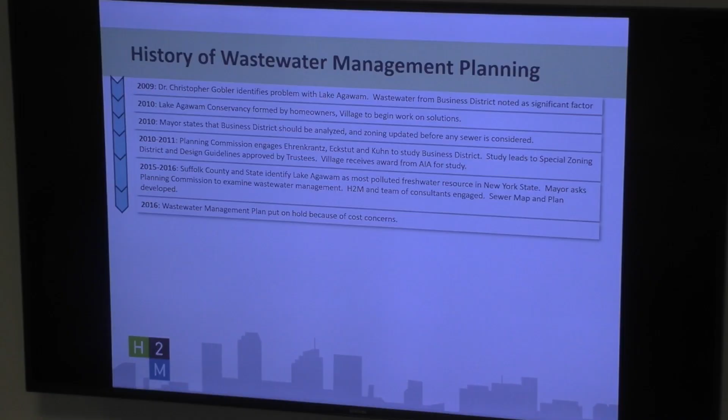H2M and a team of consultants were engaged after an RFP, and a sewer map and plan was developed. At the time in 2016, largely because of cost concerns, the wastewater management plan was put on hold, and partially I would say also allowed time for consensus to develop among village residents.

In 2018 and 2019, the village actually took some pretty broad action to address storm drainage issues, receiving grants for catch basins and other elements on Hill Street, Windmill Lane, and Jobs Lane.

And in 2018, a member of the Planning Commission, now mayor, put together on behalf of the commission a menu of all the options that had come out of all the studies and all the people who had looked at the lake.

Following that, really at the very beginning of 2019 in the winter, some residents of the lake who had not been active previously in the Lake Agawam Conservancy got involved and reinvigorated their role.

A little later that year, the new mayor and new trustees focused on clean water as a priority when they first came into office. A clean water committee was established, and the commission's done a lot of work with them - they've really done a great job. Mark Schiffer's been very involved with them. The town, county, and state were engaged by the trustees, and the Clean Water Committee created a multi-part agenda to address Lake Agawam with both public and private initiatives.

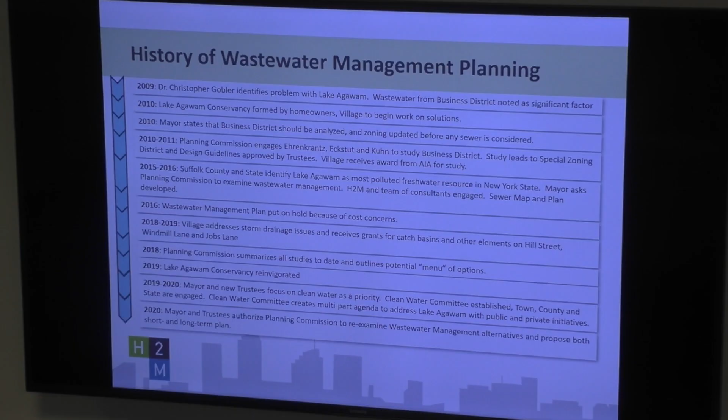One of the items they talked about was a wastewater management plan and addressing the stormwater issue from the Village Business Center. I should also say at the same time, the Planning Commission, starting with the Ehrenkrantz, Eckstut and Kuhn study, identified the need for a broader range of uses in the business district if it was going to be successful long term.

The need for more restaurants, more residences, and other uses that currently the Suffolk County Department of Health does not allow to open in the village. In the years after the Ehrenkrantz study, occupancy rates in the village went through a continual decline for the succeeding five years. We are now at a point where our occupancy has picked up.

Some of that may be transitory, hopefully some of it will be more permanent, but it is an issue of great importance. So in 2020, the mayor and trustees authorized the Planning Commission to re-examine wastewater management alternatives, and importantly for the context of Nick's study, to look at both short and long-term plans. So with that, I'll let Nick get started. Some of this presentation is going to be a refresher, and some of it's going to be new information that's been developed since we last were engaged with the village.

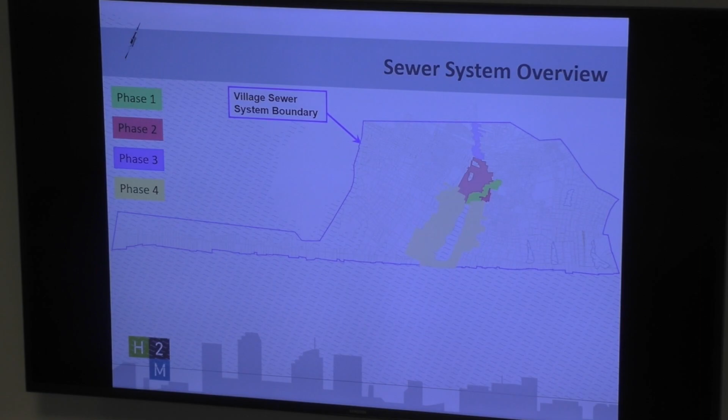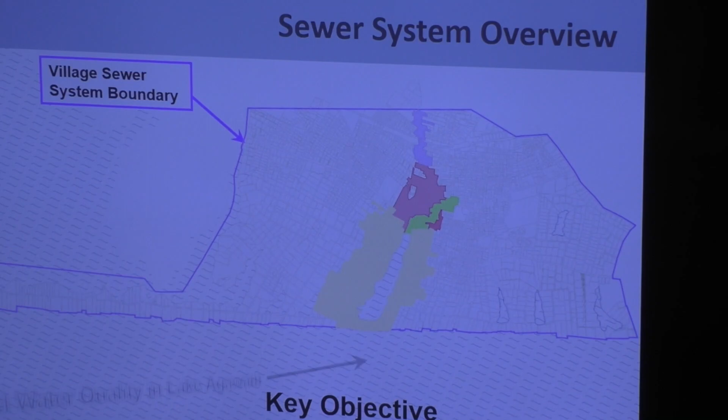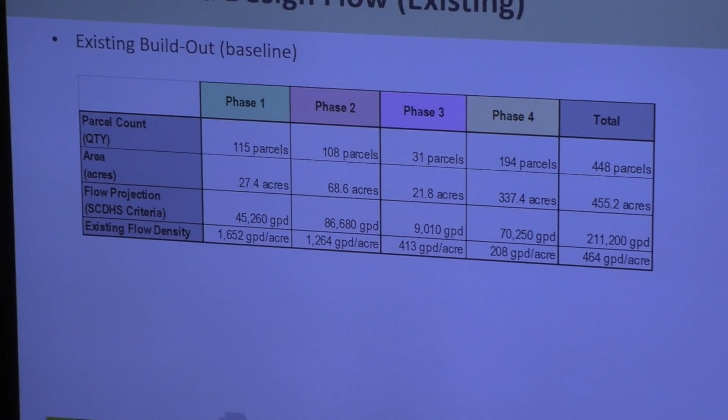However, upon further investigation, you'll see that the key objective again is Lake Agawam, protecting that water quality and improving it. As far as existing build out goes, we had evaluated each one of those areas previously identified, and most importantly, I want to draw attention to the phase 4 area.

That area is residential, low density, and it actually meets current sanitary density code restrictions of 600 gallons a day per acre. So looking at that in terms of putting sewers there, being that it's such a widespread area, the cost of infrastructure would be significantly higher than that of residential owners pursuing CPF money if eligible, but to put IA systems in to service them, to replace their antiquated systems. Phase 1, phase 2, again, is the original core area that was identified 5 years ago.

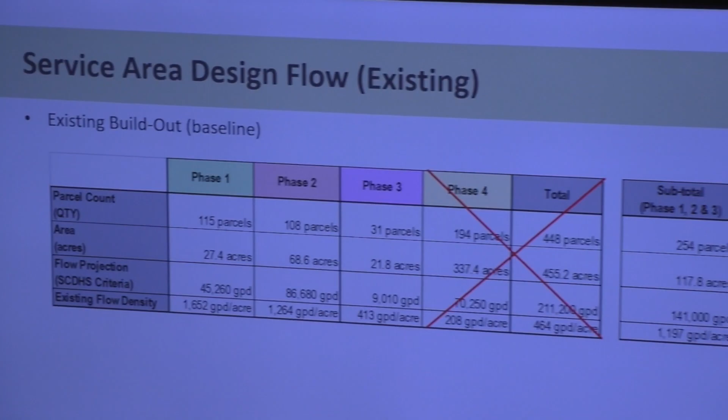And again, the phase 4 area meets the density restrictions associated with groundwater management zone 4. So essentially what we're looking at in terms of ultimate build out, big picture, is to provide service to phase 1, phase 2, and phase 3. You can see all of those phases combined is about 254 tax lots, about 118 acres, and the existing flow projection based on health department design criteria is just over 140,000 gallons a day. The existing density across those areas is about 1,200 gallons a day.

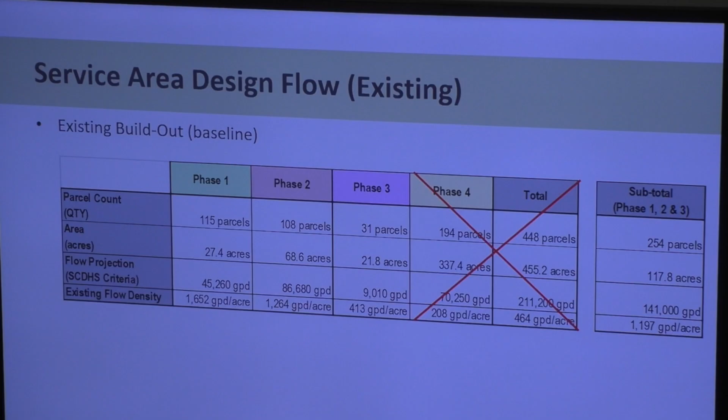So part of the study - development and environmental improvement are two key factors - but as far as development goes, there was a zoning overlay done. You need to assess what your future build out could potentially contribute in these areas. So one of the methods, we looked at many, that we thought was appropriate was applying an area weighted flow density from 3 existing downtown Main Street business districts in Suffolk County.

The 3 being Village of Patchogue, Lindenhurst, and Bayshore. When you weight their flow density across the areas they serve, you get 3,179 gallons a day per acre. So that would be your flow density.

We felt it appropriate to apply that to the phase 1 area only. So when you apply that density to phase 1, it results in almost a 2-time increase in terms of what flow could be generated there. We felt that appropriate to accommodate what potentially could come in after the zoning overlay, after you do have sewer availability.

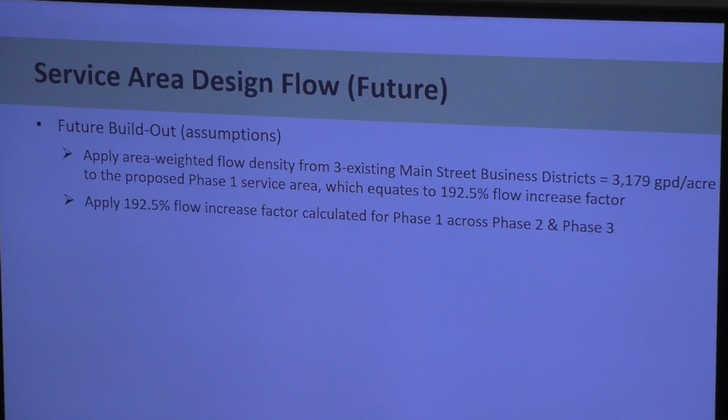So essentially what we did was we looked at the relative increase in phase 1 from adjusting to the existing Main Street business district densities, and we applied that relative adjustment, that 192.5% flow increase, to both phase 2 and 3. In doing so, we came up with a new flow projection across phase 1, 2, and 3, and essentially increased the total flow over baseline by about 130,000 gallons a day.

Okay, it's a significant increase, but I think it's appropriate and reasonable to consider, given the zoning overlay and the sanitary restrictions you have now.

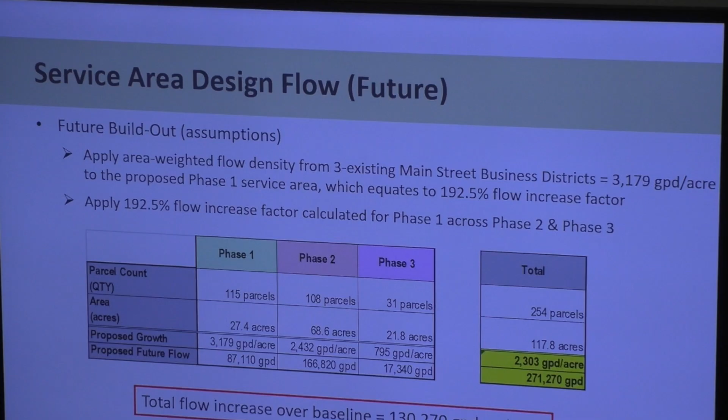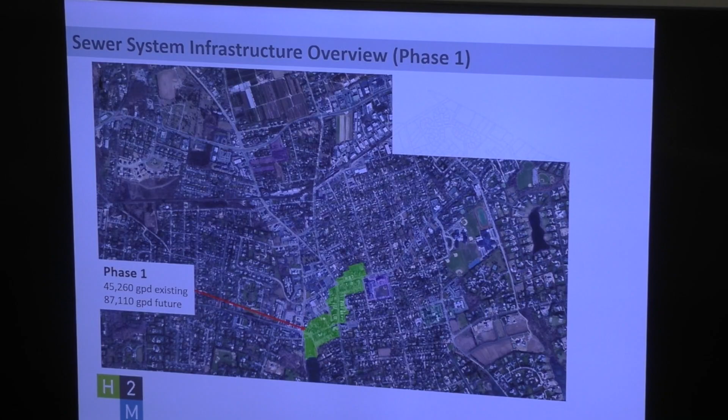So as far as infrastructure goes, I'm going to step back and just focus on phase 1. Phase 1 is the initial phase, and it would be the main focus of a map and plan moving forward. The phase 1 area existing flow is about 45,000 gallons a day, and with the future projection we just went through, it would increase almost double, up to about 87,000 gallons a day.

So as far as what you need to accommodate that, you need to know where to treat it. And I think we're all aware that there's been several alternatives tossed around. I know the next presentation is going to focus on one of those alternatives.

So that alternative is the existing Southampton Hospital treatment plant, located in close proximity to the phase 1 area. It will require a Suffolk County Sewer Agency agreement to facilitate how the village can connect to this privately held facility. Capacity expansion and SPDES permit modification requirements are to be determined. Again, there's been additional evaluations done on that facility that you'll hear more about in the second presentation.

The main issue with this facility as it stands today, and potentially moving forward in terms of feasibility with expanding that facility, is I don't believe it's suitable to accommodate the entire phase 1 through 3 sewering extents that the village is looking at.

The other alternative would be a proposed new sewage treatment plant to be constructed outside of the village, just north of County Road 39. There are two properties up there that are adjacent to one another, one of which is owned by the fire department and the other is owned by the cemetery.

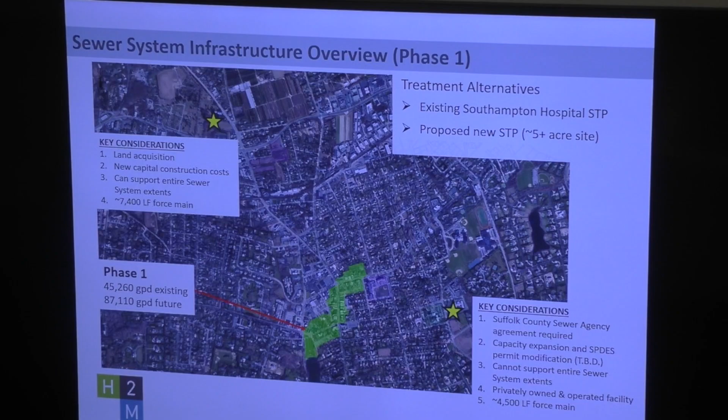So that is the trickiest part of the whole thing. As far as getting the wastewater to the hospital, that's another story. As I see it, your sewering alternatives are really routing alternatives.

The most straightforward would be a single gravity sewer run through Main Street, Job's Lane and Hill Street. Topography in the area tends to slope from north to south towards the lake. We were looking at a site just to the south side of the boundary. I believe the village acquired a property down there that makes sense to site a pump station on an easement on that lot.

In doing this though, the issues are you've got to have reconfiguration of interior building plumbing. Everyone's systems go out to their septic in the back, so you've got to re-divert flow to the front. Not only that, during construction there's going to be major disruptions to the storefronts and the sidewalks, so there's traffic and business issues there, as well as public relations issues. Once you start impacting business owners, I'm sure you're all aware, it's not going to make anyone's life easy down here. It's going to be problematic.

The overall footage of pipe you would need for this alternative route would be about 3,000 feet. The other alternative would be to route parallel sewers, essentially behind the storefronts where their existing drains already exit.

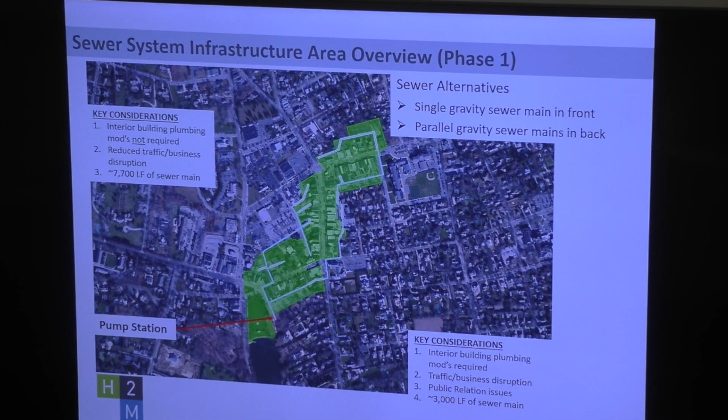Based on those overviews, some preliminary capital construction cost considerations, focused only on phase 1: you have collection and conveyance infrastructure, which would be sewers, force main, and pump station. Based on numbers we've seen recently in similar areas, assuming not just pipe installation but restoration, dewatering, and anything else you may encounter, barring unforeseen contaminants, you'd be looking at between $8 and $12 million to put in your sewers, force main, and pump station. That's a range covering both going in front, or the alternative to route the parallel mains in the back.

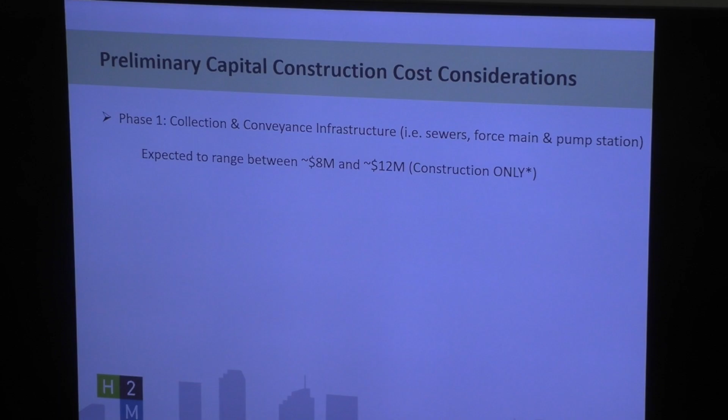These numbers are really just focused on construction only. As far as the treatment infrastructure, construction only, I have a number generated assuming you were going to build out a facility that could handle the initial phase 1 area at full build out, so it would essentially be a 100,000 gallon a day facility. To build a municipal type facility like that would be about $10 million on that property up north.

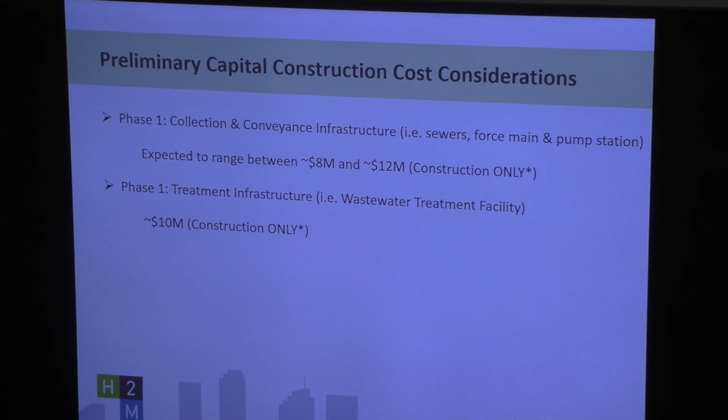The construction-only costs represent a range for the two different sewer routing options, as well as construction of a new treatment facility. I don't want to take away anyone's thunder, but I know they have a study that was done. They have costs associated with acquisition and improvements to the treatment plant at the hospital, where they're budgeting about $4 million of improvements to connect to it and serve the phase 1 area. I'm sure more details and questions may come up when they go through that.

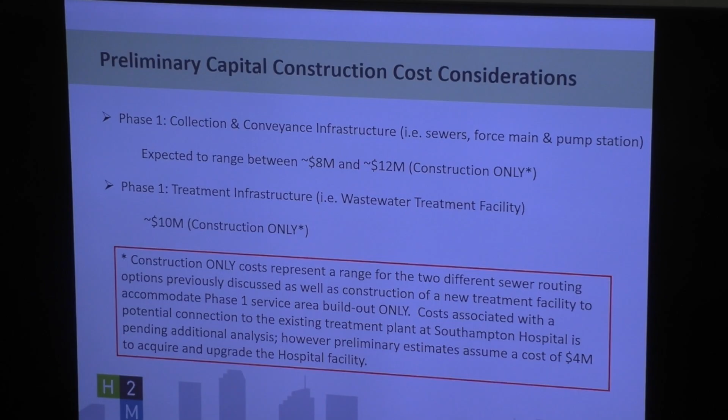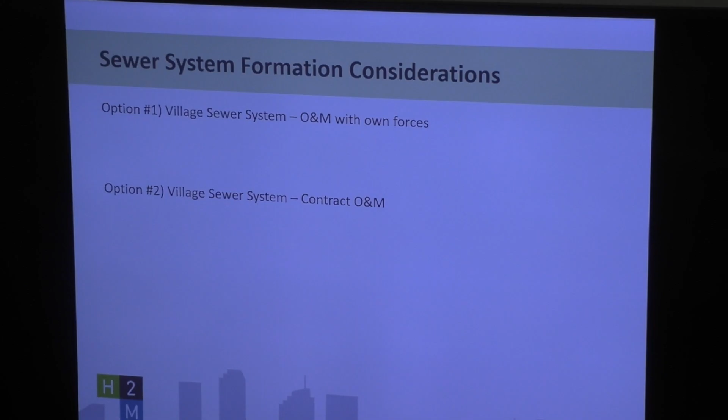So the sewer system formation considerations — this is really the core of the alternatives analysis. These are the questions that need to get answered before we can move forward. Your baseline option would be a village sewer system operated, maintained, and managed with your own forces. Option 2 would be a village sewer system where you contract out all operation and maintenance services. Option 3 is a village sewer system with a private utility agreement.

And again, I have cited here Lightower Capital Partners and the Suffolk Water and Sewer Company LLC, that they're stating they're going to operate under.

So option 1 likely is the most costly option — the village owning, operating, and maintaining infrastructure with your own forces. Without a doubt, this is going to be their most costly option. It does, however, provide the village full control over how you expand your district, how you assess your district, how you manage your district. So with costs come benefits too.

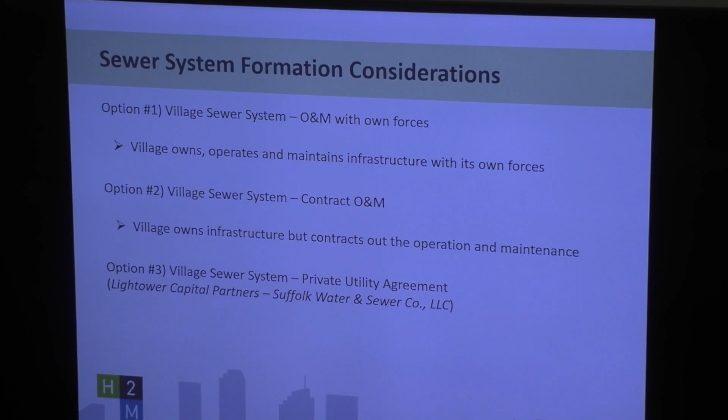Option 2, again, is the village owning the infrastructure but contracting out the operation and maintenance. The village has to administer and oversee contract work for operation and maintenance of infrastructure, and essentially perform your own quality control on that contractor to make sure the stuff you own is getting serviced properly per your contract stipulations. The last option is you enter into a legal agreement with a private utility who owns and/or leases and operates and maintains the infrastructure.

So there are many different iterations of how this can evolve, most of which I didn't dive into in detail until we get input from the next presentation — that's part of the conversations moving forward. Regardless of whatever option washes out at the end and becomes the selected one to base your mapping plan off of, all of them are going to require review by legal counsel for the formation of a sewer district.

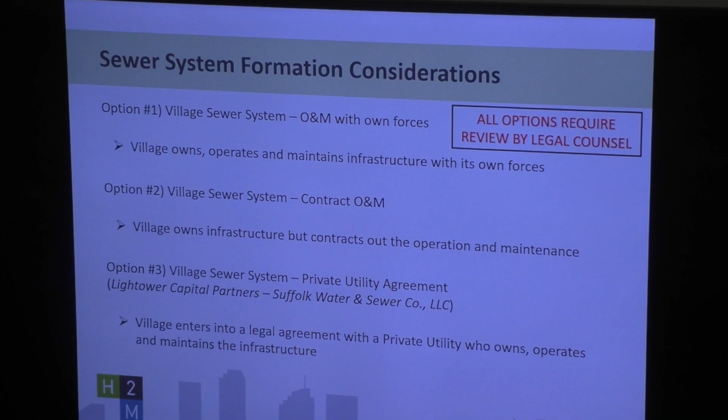The key next steps are really to confirm the feasibility of a hospital treatment facility for the phase 1 service area. You need to identify regulatory, fiscal, and legal requirements, and again that can go any which way — it could be a private utility, or a village working out a deal with the property owner. There are a lot of conversations that need to evolve in order to determine what makes the most sense moving forward.

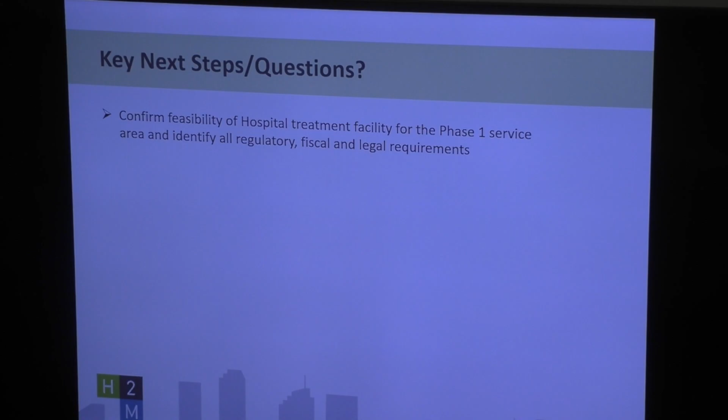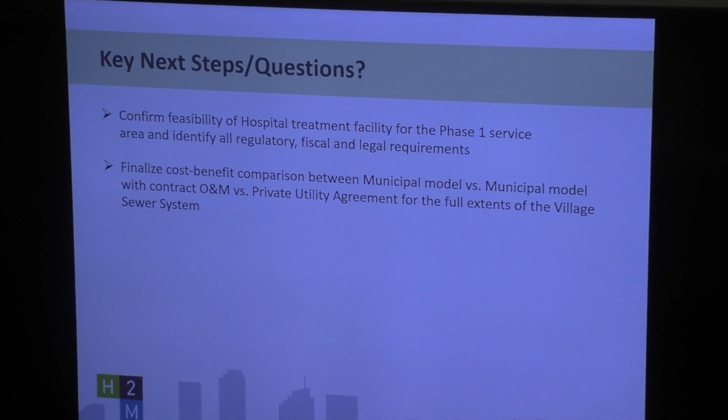Once that is vetted, then we could really push forward and finalize the cost-benefit comparison between the municipal model with contract O&M versus the private utility agreement.

Once you vet that and determine what your selected alternative is, now you have a baseline on which to prepare the mapping plan, and you can form your village-wide sewer system.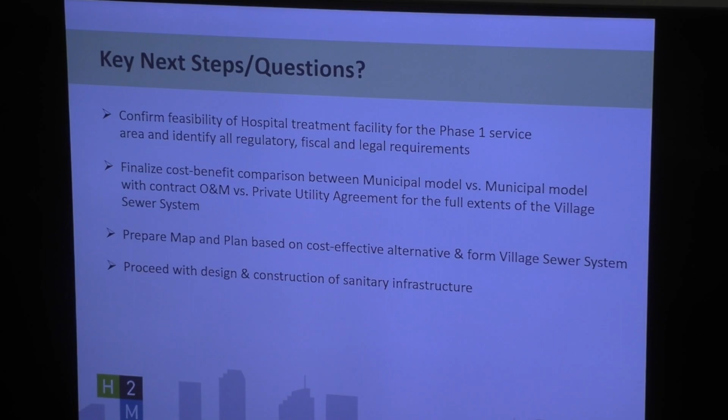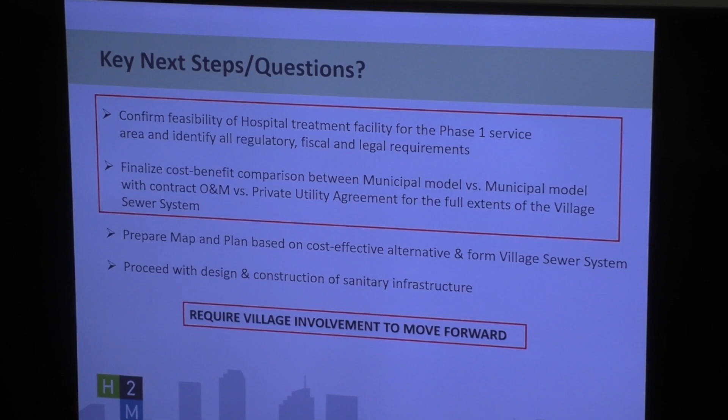So the next steps after that are proceeding with design and construction of sanitary infrastructure. These first two bullets are really important and necessary in order to move anything forward. Otherwise it's going to be stuck in the perpetual logjam, similar to where we ended on the prior study. We did get a little further along, but I think there were certain issues that weren't answered in the beginning stages of that project, which led to it ultimately being put on pause.

So I don't know if there are any questions or comments on where we stand. I think we're going to hold questions for after the second presentation, and then have questions on everything. So, currently, ready? Great.

Let me do a little introduction. Light Tower Group approached the village about 6 months ago, I'm thinking.

Six months ago with an option for private financing of a sewer system. It's obviously an important alternative for us to look at. We've been working with Light Tower to bring it to a point where it can now get into a public conversation, and this will all be presented to the trustees next month. So I think we're ready to now move this into the broader conversation.

So Frank, want to introduce yourself and your team? Mr. Chairman, thank you very much. Good evening, my name is Frank McDonough. I'm the managing partner of Light Tower Capital Partners, and I'm joined tonight by two important members of our team: first, our engineering team, R&M Engineers, and also our construction team, Kelly Development. Not here, but available, despite the audio issues, are our rate experts, our financing experts, our legal experts, that if there are questions, they can call in and we can address them.

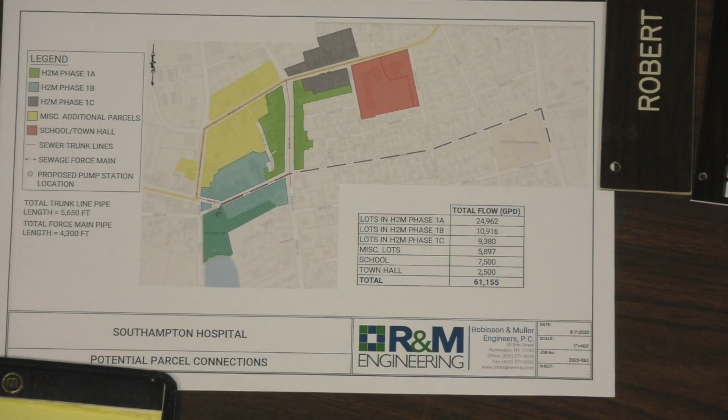We can share, we have plenty. Do you have any for the audience? Yeah, let us share. An extra mic, okay.

Thank you. My name is Matt Shiner, I'm with Robinson and Muller Engineers. We were engaged by Light Tower Capital to perform an analysis of the existing sewage treatment plant at Southampton Hospital. Our report is part of the report I just distributed to you all as an appendix.

We did a pretty thorough analysis. We took samples, we did readings of flow, and we followed all the standard calculations that are normally submitted to the health department to ensure the amount of available flow that is assumed is appropriate. So assuming this project moves forward with Light Tower, that exact report is what would be submitted to Suffolk County Department of Health Services. Based on that report, we determined there is approximately just over 62,000 gallons of flow available in that treatment plant.

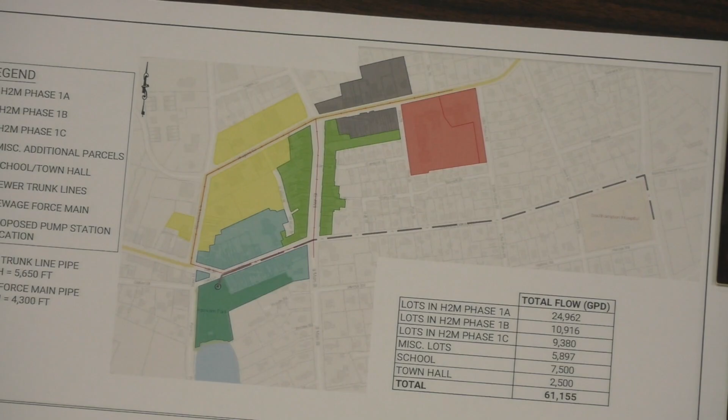On the flexibility of the design, we looked at, very similar to H2M, both ideas of doing it down the main street, which would require some internal plumbing within basements or crawl spaces in the buildings to get out to the front, or doing infrastructure through the rear parking areas, whether low pressure sewer or gravity sewer. So our numbers are actually very similar to what H2M talked about, which gives us some flexibility.

We broke it up into some smaller phases. Again, we can look at the individual parcels and how they can connect, and come up with the ultimate number. As long as it's under 62,200 gallons, we feel very comfortable we can handle most of the downtown village at this phase. I'll be happy to answer any questions you may have.

Good afternoon, Mr. Chairman, members of the board, thank you very much. My name is Mike Kelly, Kelly Development.

I've been working with Frank, Chris, and Matt over the past 7 or 8 months. Overall, I've built over 2,300 homes across Nassau and Suffolk. I've been involved in the build out of several pump stations and sewage treatment plants out here in Suffolk County.

To reiterate what Matt and Chris both said, we looked at the quickest way to get in the ground and get pipe from Southampton Town Hall down to a pump station at the northeast corner of Lake Agawam. The quickest way is to run a gravity system down Main Street to that location. That would involve, as Nick mentioned, coming out the front of each one of these businesses and buildings, connecting into a main in the middle of Main Street.

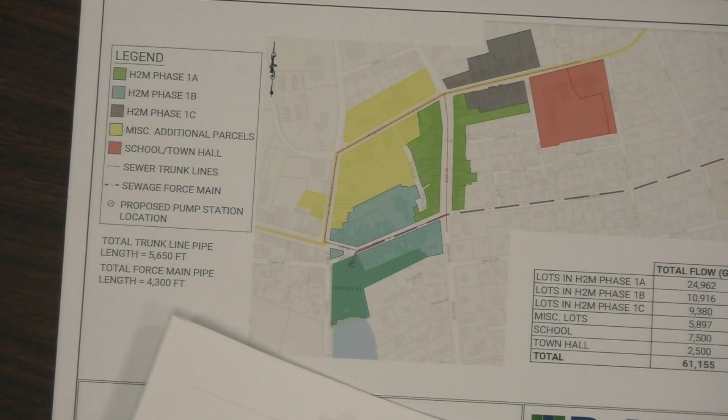I have a question about that. I'll do my best, but isn't the hospital originally licensed for something like 800 beds? They're currently only using 189, or 198, or something like that. I believe the number is 125 currently.

Right, so it's based on that 125 number. I'm not disagreeing with anything you said, I just want to point out that I could easily explain why the treatment plant is so big to begin with. I didn't know that 800 number you just quoted, but that could easily explain why the treatment plant was sized as large as it was back in the 70s when it was originally built.

But they currently are operating with that number of beds, and as far as we know, that's an ancient model. I don't think anyone would run a hospital that way anymore. No one does.

I should make an editorial comment since we're all throwing around using someone else's property, which we have a habit of doing. Any of these options will require the Southampton Hospital Corporation, which owns the property, to agree that this is something they want to do. And the issue of how many beds you count, or how much capacity you keep for the hospital, is really a decision they will have to agree to. Yes, absolutely.

Paul, I want to ask a question. I think the village owns 20 acres up near the Tuckahoe School. In that area, there was a shooting range for the police department up there.

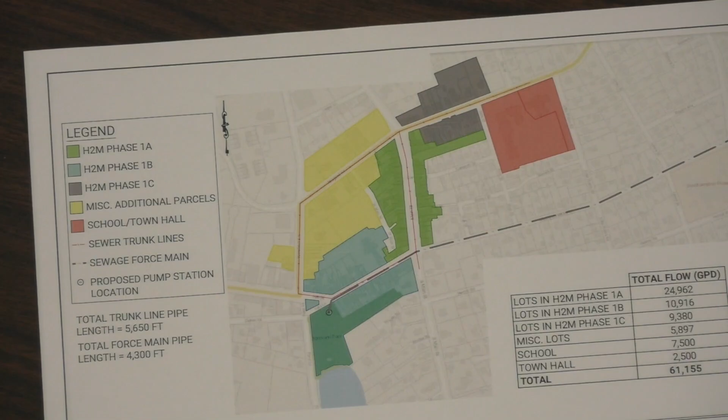So once again, Light Tower's view is we're listening to the village. We're executing on the village's plan. Our understanding is the village would like to have a map and plan in a sewer district. We agree - this is not an à la carte arrangement, but there are many ways to address all of these issues, and whether or not tonight's the forum for that remains to be seen. But this is not an unusual situation, and I believe there are plenty of alternatives available to make everyone comfortable on that effect.

All right, so as I said at the beginning, we are going to be at the trustees meeting next month. Is there a general consensus on the commission that we want to go forward and recommend that the trustees approve proceeding with a map and plan and further study of, I guess, two items - both the options and the per building cost of those options? Is that something we can comment on? Is there a discussion?

Is there a large cost with the map and plan? Do you want to talk a little bit about that? Well, right now, I think the alternatives analysis needs to get flushed out. As far as cost associated with a map and plan, we have the framework together already - the village did pay H2M to put a map and plan together. The overall area of that map and plan is somewhat consistent with phase 1 and 2. Phase 3 is additional areas, so there would be some additional effort. I can't tell you right now what the cost would be, but I can tell you it won't be what it was the first time around, because we're not reinventing the wheel here - we're building off of what was already developed.